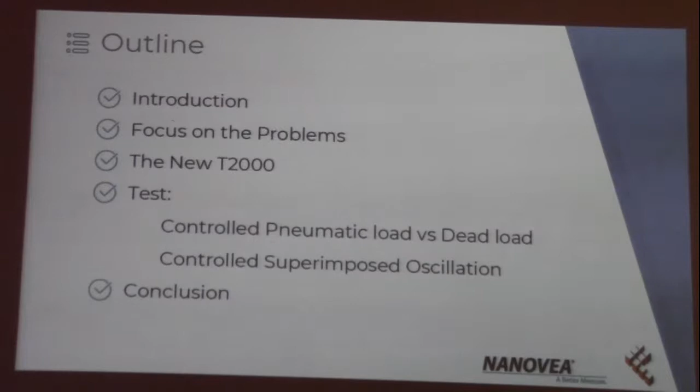Today I will present our new system, a Tribometer. I want to stress more the instrument itself, and we present some first tests we performed with it. So we'll focus on the problem, present the instrument, go through the first two tests, and finish with a little conclusion. So, who we are?

We are producers of instruments, mainly. We have a lot of experience developing instruments, basically for 3D reconstruction of surfaces and roughness analysis, but also for indentation testing from the nanoscale to the macro scale. That takes care of hardness, elastic modulus, characteristic stiffness, and things like this, and then the Tribometer, which takes care of wear rate and friction.

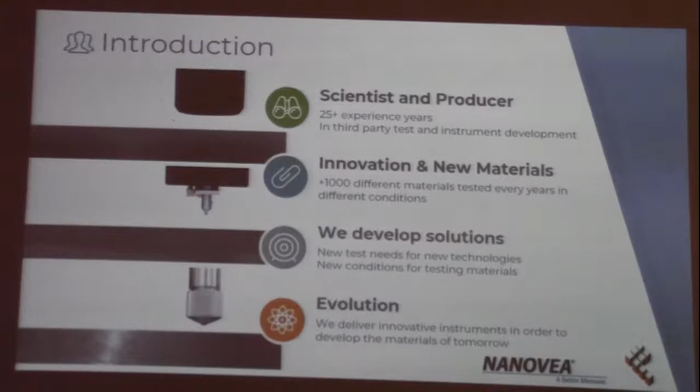We have the pleasure to work with thousands of different materials every year, and we also do third-party testing here in Italy and the USA. So we started to develop customized solutions for your testing needs, and we take care of the evolution. We want to produce innovative testing in order to let people understand new material behaviors.

So friction can be a problem or a solution. If you have a brake and want to brake with your car, it's a solution, but mainly it can also be a problem, and it's strongly connected with fatigue on the surface. Friction causes problems in industry and is also related to metal fatigue. It's worth nearly 1% of the internal gross product.

So in a lot of situations, we want to understand the behavior of our materials. Now there are a lot of different kinds of testing available in the tribological world. It takes care of testing at different temperatures, in different linear or rotating motion, corrosive environments, but there are some kinds of tests that are not taken care of now - ones with a superimposed oscillation force.

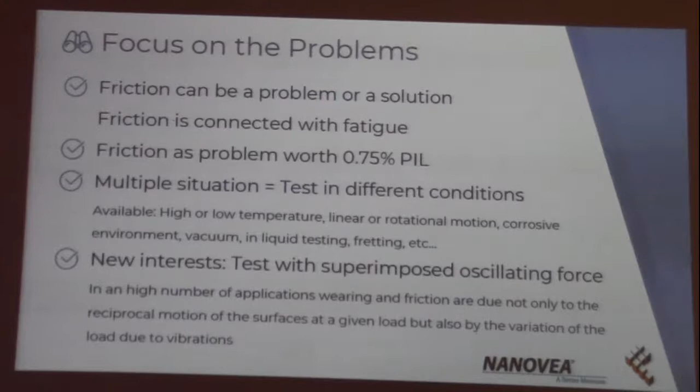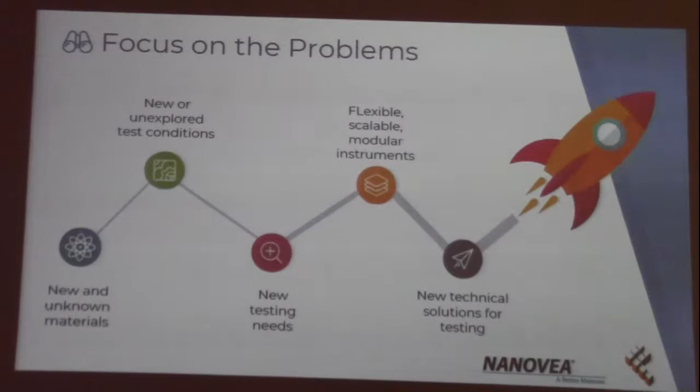So when you have the force that occurs from your fatigue and want to stress the material also with a superimposed oscillating force - this is why we started to develop a new system that takes care of this kind of testing need. And we propose the new T2000.

Why is this kind of instrument new? For three main reasons. For the technique by which we apply the load, that is the pneumatic technique. Right now there are no tribometers that apply force with a pneumatic actuator, plus an electromagnetic actuator that works applying a superimposed oscillating force.

And we have this double load, so we have the main load, pneumatic, and the oscillating one, electromagnetic, which can work up to 150 Hz. And we can add some accessories integrated into the system for 3D total reconstruction of the wearing track, nanotribology, temperature control, and all the things you want to understand your material's behavior.

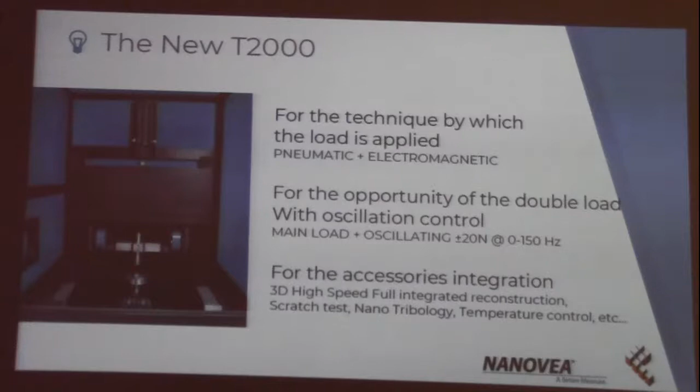So right now we have two different kinds of systems. The dead load traditional instruments are based on a dead load simply applied on the sample, and in this case the friction is evaluated from deflection of the main arm that applies the load.

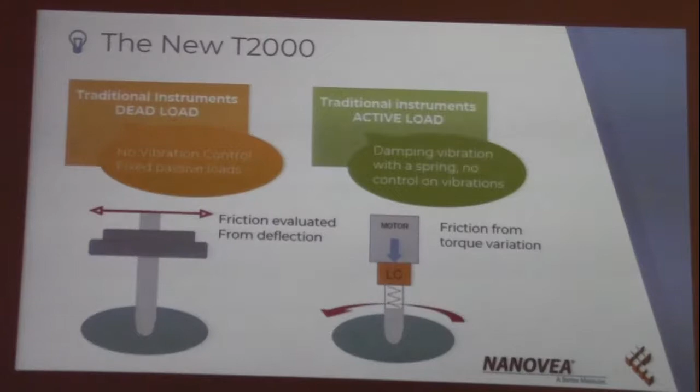The other instrument is active load with a standard motor, and since everything is very hard, you need to dampen the undesired vibration with a spring, mainly. So in the first case you have no control on the vibration that occurs. In the other case, you don't take care of the vibration and you don't have perfect control on the load cell about the load you want to apply.

So our solution is to use a pneumatic main load - think about a car that uses pneumatic damping for its vibration system. It's natural damping for undesired vibration, but it permits us to use a load cell in axis to monitor the load and apply a very precise load pneumatically.

And then we have an electromagnetic stage, and this electromagnetic stage can apply plus minus 20 Newton up to 150 Hertz, and it's electromagnetic because we have zero friction in this case, and we don't have vibration, and we have a very fast response that lets us apply this up to 150 Hertz.

So we have a direct load cell in axis for understanding the load that we apply, and we take care of the friction. We monitor the friction in two ways: with load cell direct measurement of friction, and also by torque variation of the motor - that can be another solution for taking care of the friction.

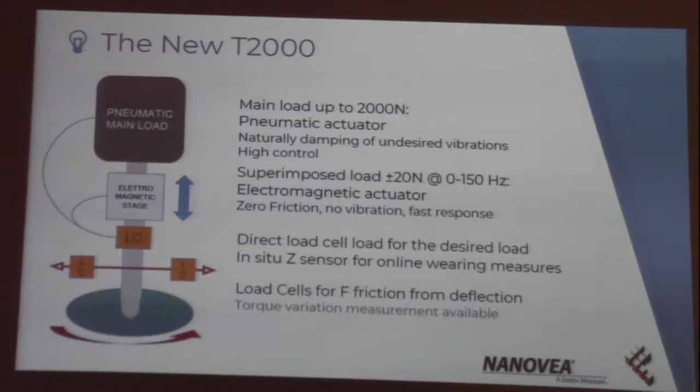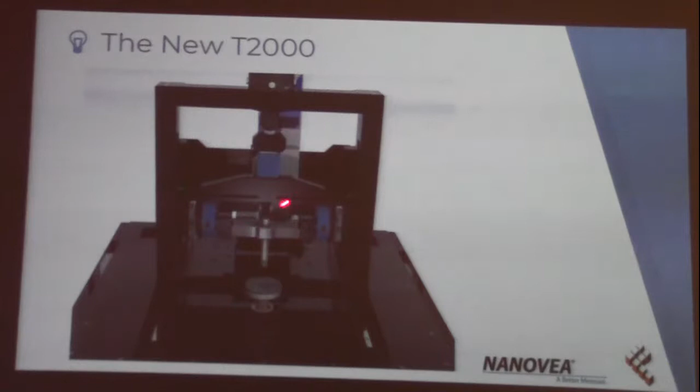So this is a 3D reconstruction of our instrument, in which we can see this part where the sample is taken, and here we apply the load - we can talk about this deeply during lunch or after. And for example, this is the accessory for the superimposed force with the electromagnetic stage.

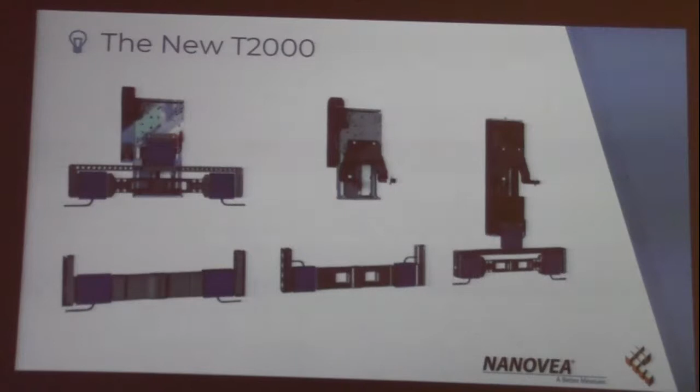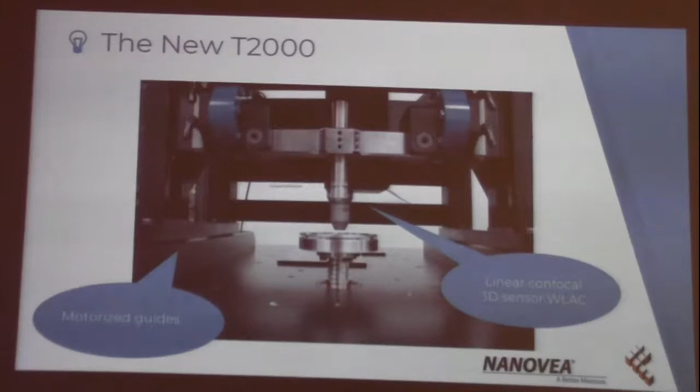We can add accessories for taking care of temperature, corrosion, liquid stress, and a linear confocal 3D system that after the test everything goes in front, and under the 3D reconstruction you can have information about the wearing directly.

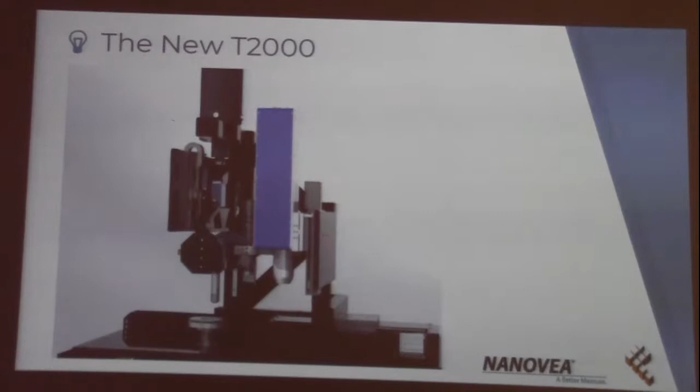A precise measurement of the material that is worn by the test. So these are the first tests we took care of: a wear resistant coating of 300 microns, and under the ASTM G99, that is a pin on disc test with precise norm, and we did a test in comparison with the standard dead load tribometer.

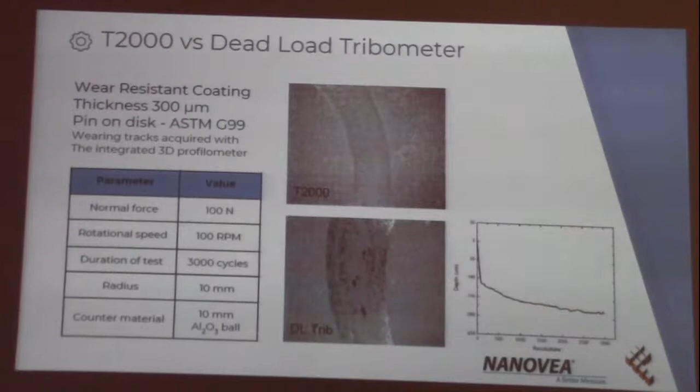So the main fact is that regarding the standard test, we have less noise, and we have more or less the same behavior. But if we look at the surface and the fatigue that occurs, we can see that we have a more smooth response of the surface.

And also if we perform a 3D reconstruction, we can see that since there is no undesired vibration during the test, all the wearing tracks are of the same shape. Instead with the standard dead load tribometer, when vibrations are not taken care of, you have in different positions different behavior of the materials, and so you have a less accurate result.

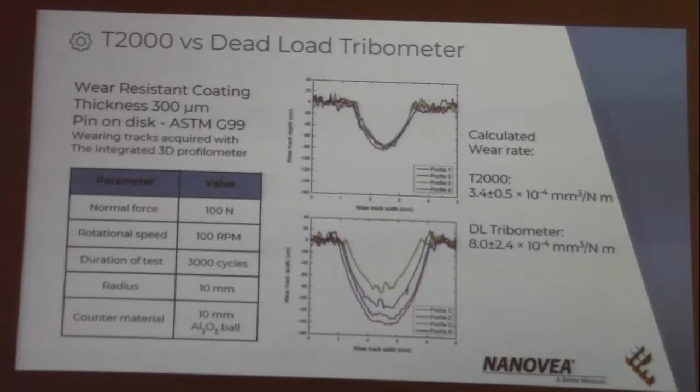On your test, then we perform two tests with the dual load. So in this case, in black, we can see on a copper sample, the basic sample, on the same kind of test, we have 0 Newton vibration superimposed and 5 Newton vibration superimposed.

So if we look at the 0 Newton, we have a plateau area in which simply wearing occurs. Then we have the production of third body particles that are inside our wearing tracks and start lowering the friction, and then we occur severe fatigue.

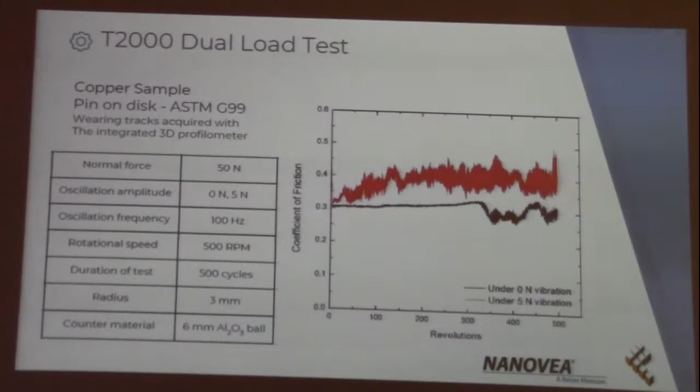And if we apply 5 Newton, we can see that the friction coefficient starts to rise higher, and we have much higher fatigue, and the wearing volume is maybe 2 times more than in the case of no other vibration.

This can be very interesting because we can see that in some point, also if the copper is quite an isotropic material, we can see that there are some areas that are more stressed by the test, and in the case of superimposed 5 Newton oscillation, also if the oscillation period is not the same as the frequency of the motor shaft.

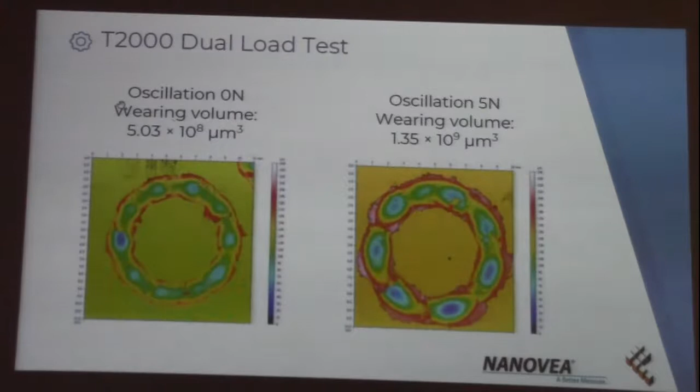And so these are mainly due to the material properties or non-isotropic material properties, and we can see the difference in behavior, and we can imagine using this kind of test in a case in which, for example, in an airplane, when we have superimposed vibration due to the whole system that occurs during the life of the material.

And this is another test. In this case it's a coating, thin coating, and we can see under 0 vibration the same plateau, and then severe fatigue occurs when we reach the substrate, and in this case under 5 Newtons and 10 Newtons the behavior is the same. So we can understand that without superimposed vibration we have one kind of behavior in the material.

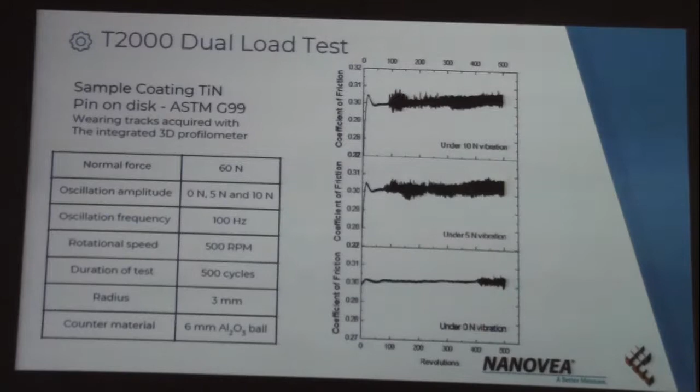Then if we have vibration, the behavior is similar, although the final result can be different, but we can clearly see a different behavior with vibration versus no vibration, that until now it was not possible to see with this kind of test. And these are the results with the 3D reconstruction.

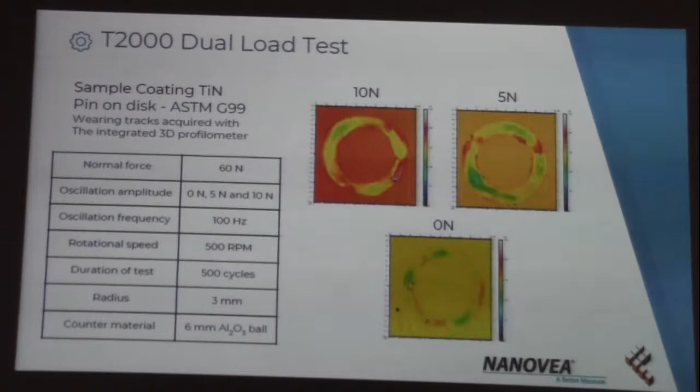Totally, we can see that with respect to the surface, the wear track is much lower when we add an oscillation force on this.

So this is why we developed this kind of system, because of new testing needs, because of new materials and new uses of materials. So we have an innovative design, a new dual load system that led us to be more accurate with respect to the standard testing machines that are now present.